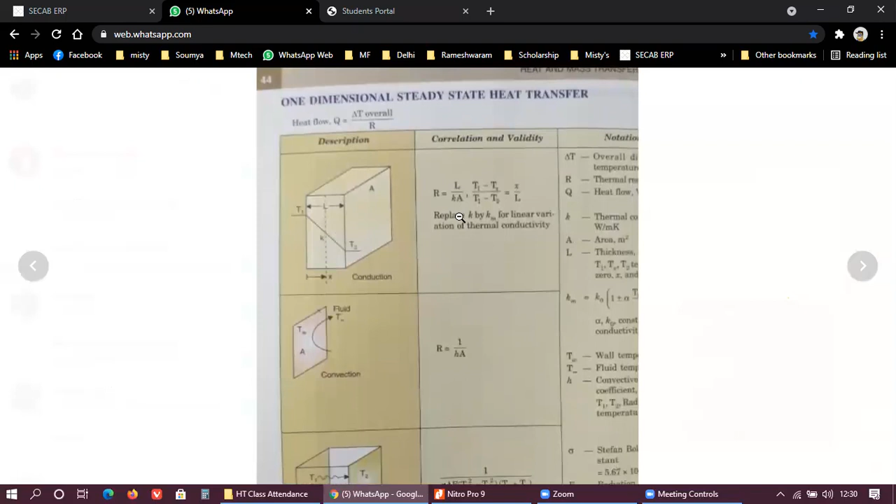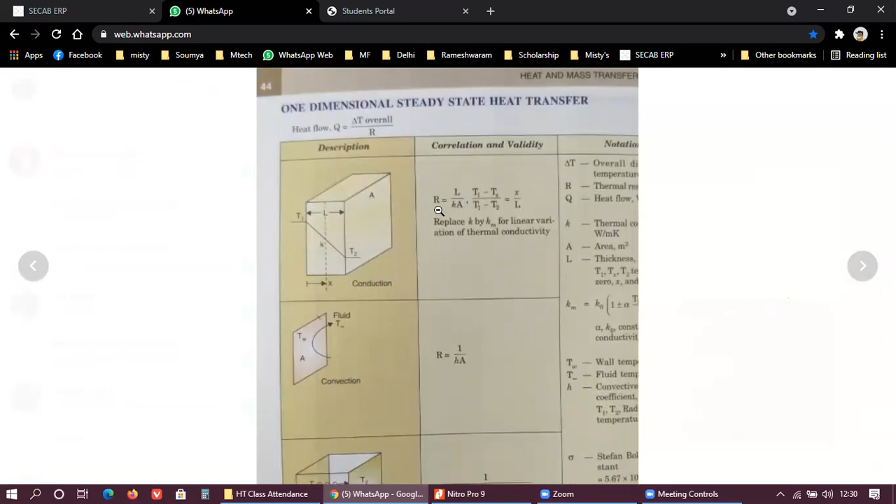Okay, so this R is equal to L by Ka. This value of R, you just substitute that here. So the expression will be exactly like this. What you are getting, Q is equal to minus Ka divided by L into T2 minus T1. Okay, so here there is a negative sign. So what is this negative sign for? Because the value of T2 is less than T1, right? To make this rate of heat transfer positive, we have introduced this negative sign here.

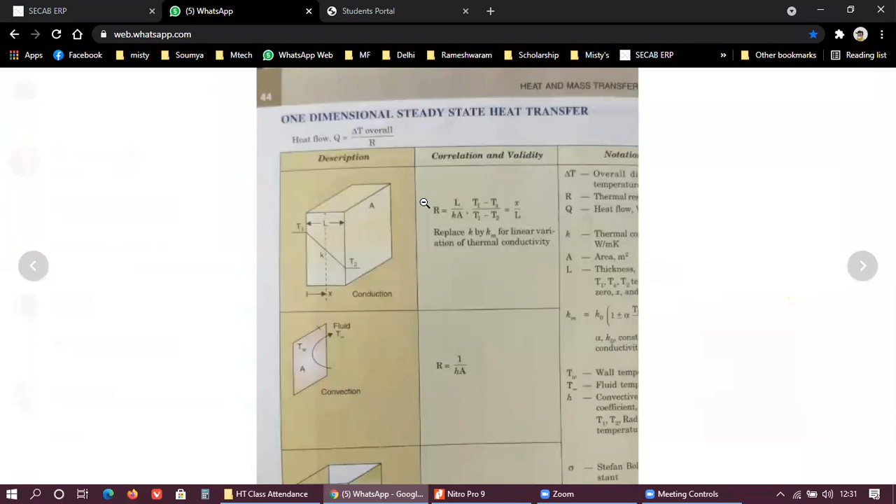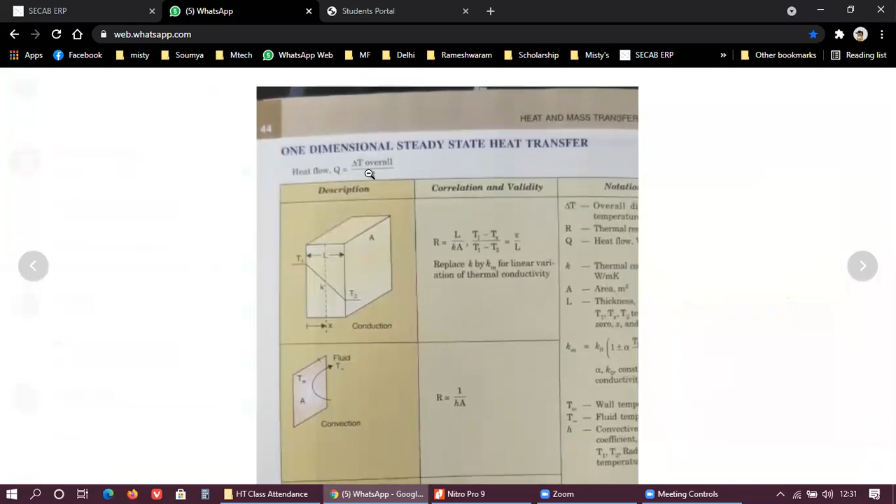Okay, see here. So this is the data handbook page number 44. On the top here you can see heat flow is equal to, just below one dimensional steady state heat transfer, right? Q is equal to delta T by R. Get ready with pen and paper. So what is the value of delta T? It is the temperature difference, so it is T1 minus T2.

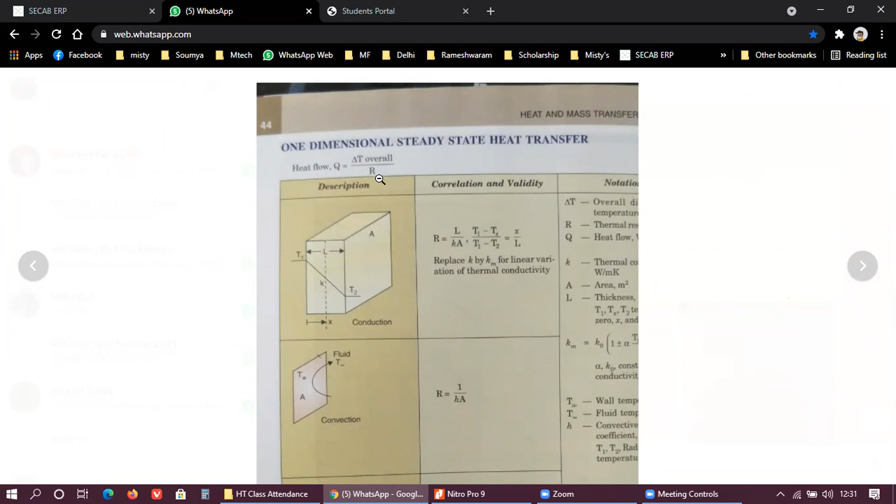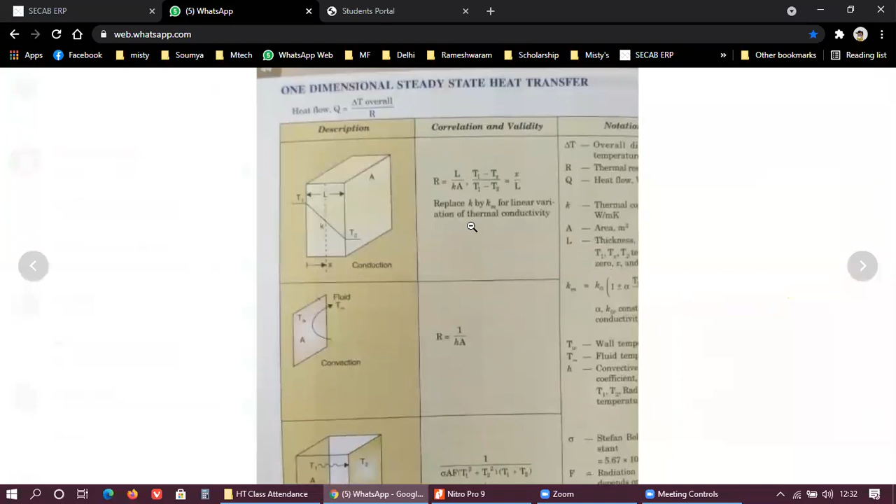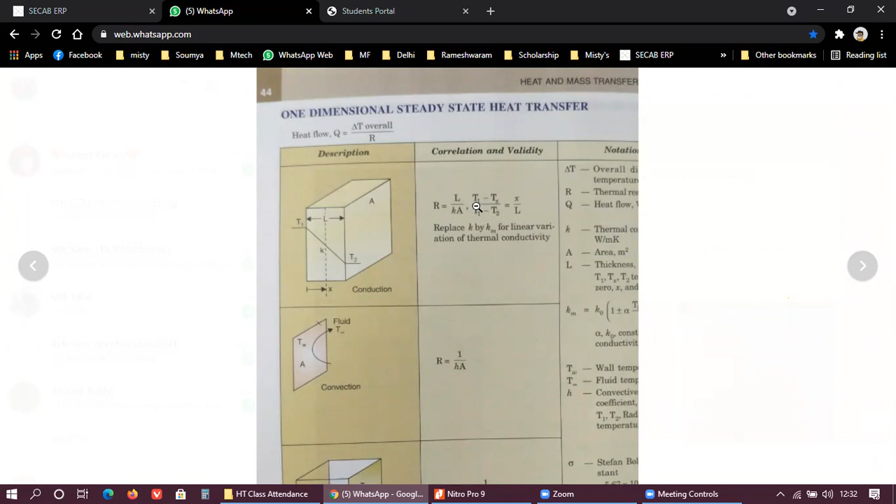T1 minus T2 divided by R. What is the value of R? It is L by Ka. R is nothing but L by Ka. You transfer Ka to the numerator part. So you will get Ka into bracket T1 minus T2 divided by L. Okay. Is it okay? Yes, sir. Again, you will get the same expression, the expression which I have written.

But what I have written here is the exact Fourier's law of conduction, right? So this negative sign is there. Why is the negative sign there? Because the value of T2 is less than T1. So this term in the bracket goes negative. So to make the rate of heat transfer positive, we are multiplying it by another negative sign.

Otherwise, you can write the same expression. You just interchange this T2 minus T1. Directly you can write Q is equal to Ka by L. Remove that negative sign. Q is equal to Ka by L multiplied by T1 minus T2. That will also give the same result.

But in this problem, one thing you have to keep in mind: what has been asked here is rate of heat transfer per unit area. So that's why we have to calculate Q by A, right? Rate of heat transfer per unit area. So it is a very simple problem, not that difficult. Any doubt here? No, sir.